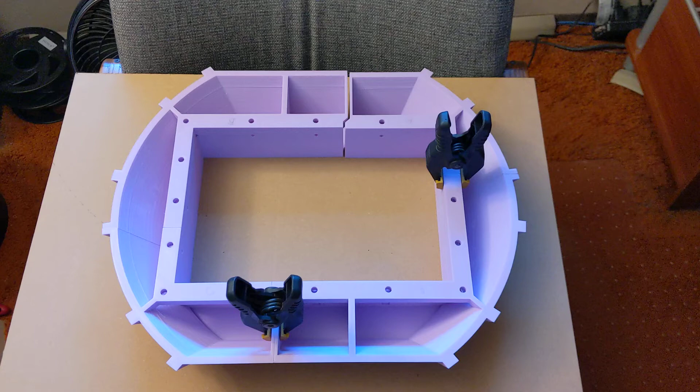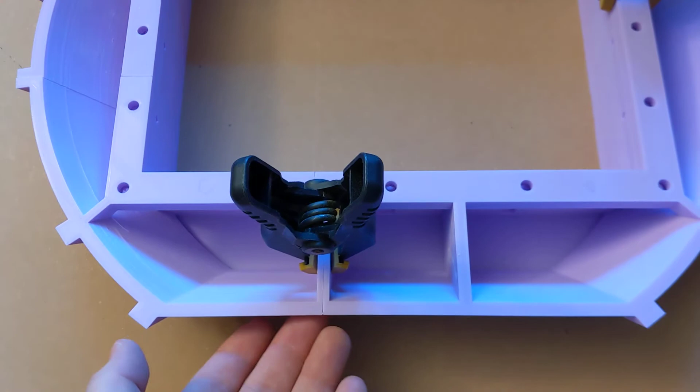Alright, another picture of the skirt here, another video of the skirt. Seem to have a slight issue here. I've got this clamped where it's flush front and back. These two pieces are flush front and back. That leaves me with this, which I think is my problem piece.

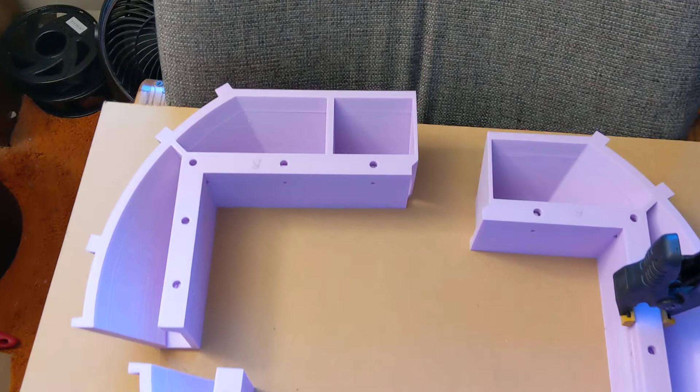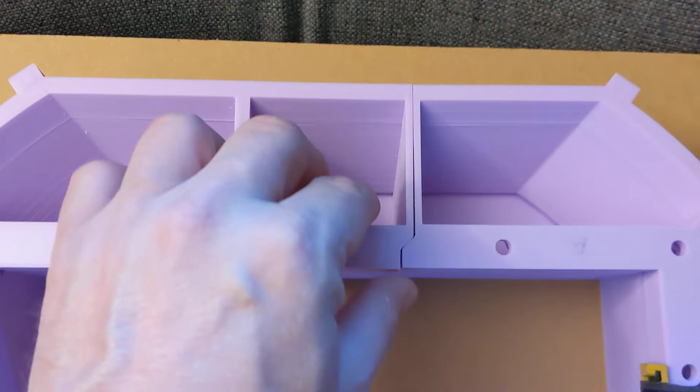If I line this up flush front and back, that is definitely not right, that is way off. Now, it's a little bit hard to tell because I've got the other two sides clamped. But one thing I noticed is if you look at this part, if I do line this joint up flush in the back, it's flush right here. But by the time you get to the end of this support, this piece is obviously longer.

So, yeah, I don't know if my printer messed that up again or if it's the sliced file. I might actually load the file into my slicer and put those two pieces up against each other and see. I don't know if my slicer maybe messed it up when it sliced it or if my printer had an issue printing it. It's just weird that the back corner would be fine and the front corner would be off like that.

If I do put this one together with my fingers, just kind of flush up the front, then I can go over here and kind of join this together. So I'm trying to figure out how to fix this basically without reprinting this entire piece. If I reprint it and find out that there's something wrong in the file and it just does the same thing again, that's a lot of plastic wasted. And it is just the skirt that nobody sees.

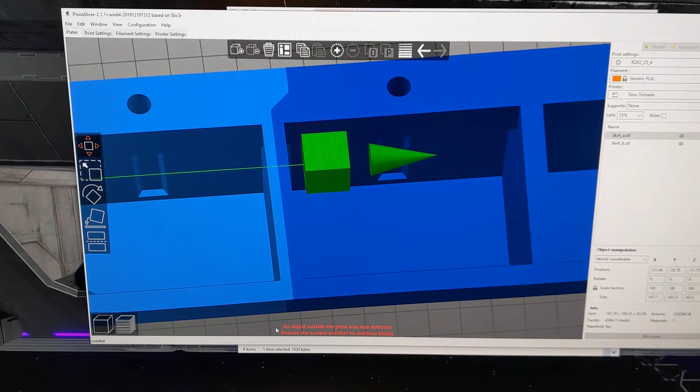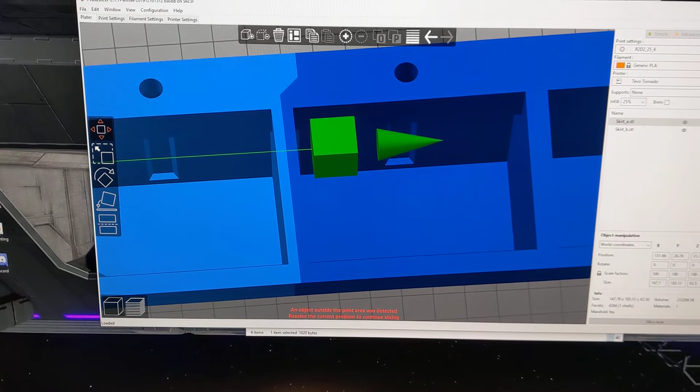This is piece A and B in PrusaSlicer, and putting the pieces together, they fit perfectly, so it's not a problem with the models. Unfortunately, I can't slice them because the two pieces put together are bigger than my print bed, so there's a little error message at the bottom of the screen basically saying something's off the printable area. I guess I could reduce them in size by 50% and then slice them and see if I can see something introduced by the slicer, but at this point I'm thinking it must have been my printer. How or what or why, I don't know.

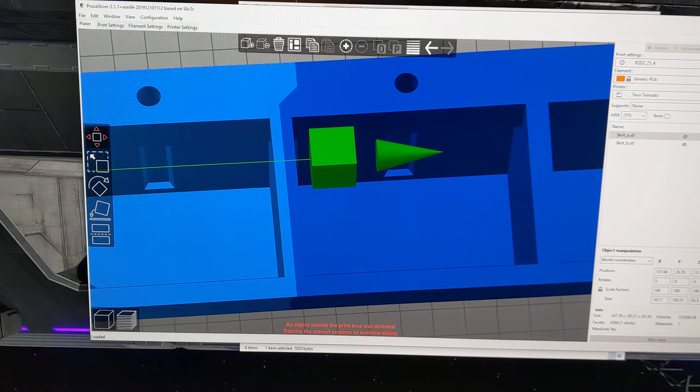It makes me nervous for the rest of the project, if pieces can just be printed out of alignment like that. I'm sure I'm not the only one, though, that has this issue. So I'll have to look online. I have just sent a request to sign up to the 3D Printed Droids Facebook group, where I can probably find more information about this, maybe.

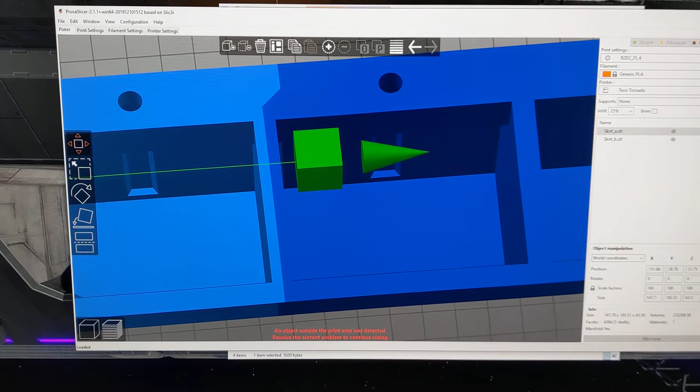I have tried dremeling some of the top of the actual piece, and it does seem to be making it fit a bit better. I'm also going to have to dremel the other side of the piece, this side up here.

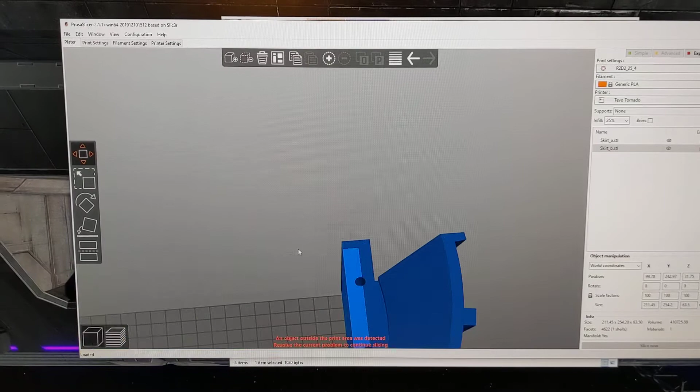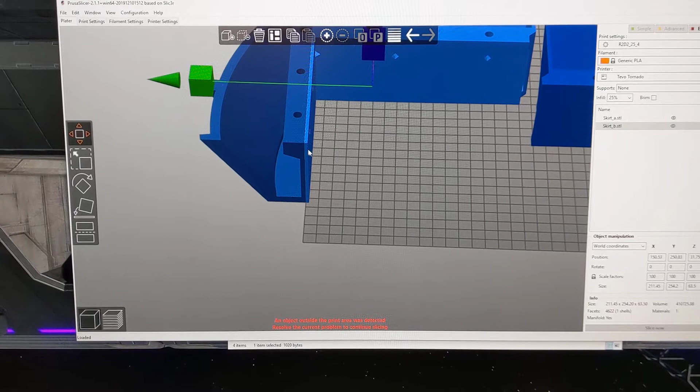Because dremeling the other side makes a slight, I just moved it out of position there. Dremeling this side makes these pieces not fit perfectly flush, so this one isn't fitting flush, so I'm basically going to have to dremel a bunch of this away, which again will still leave this surface area that should mate okay. If I'm nervous that that's not strong enough, again on a piece that doesn't really support any weight, not structural,

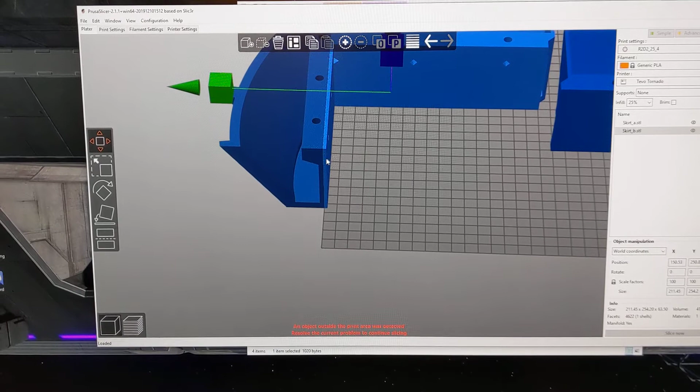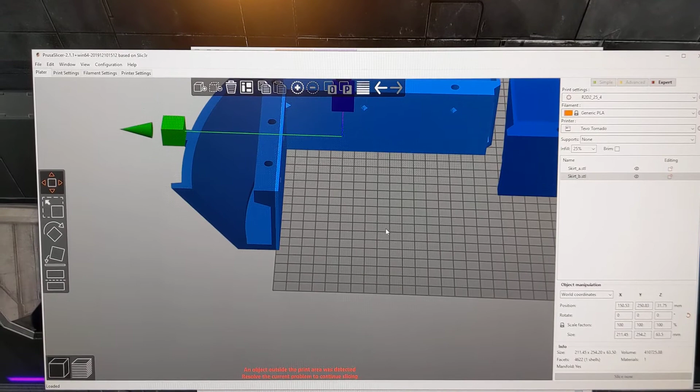I could put a piece of plastic across here and glue it in as like a brace, and maybe down here, maybe even across this side. Well, I guess what I'm going to have to do is try that, get the pieces put together, and then put the top ring pieces on top of it and see how the holes line up. If the holes line up a little bit off, that should be okay. I should be able to elongate the holes. Or again, I could just try reprinting that one large piece and see if it prints properly the second time.

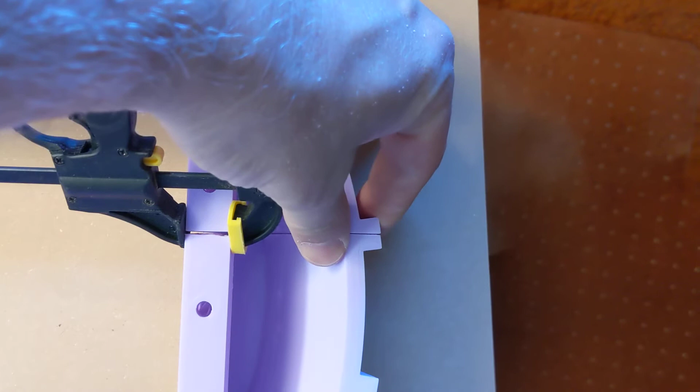Filed away some of this angle so I could push this piece back so it's flush up front, which puts it just a little bit off in the back. Sanded off, Dremeled off down this seam on this side of this one piece that's off, making the rib, I mean, if I just get another decent clamp, I can clamp that so it's flush. There's plenty enough room for glue for a good bond. This one's flush. This one's flush.

So it looks like just kind of manhandling this piece into shape by dremeling it and then using a couple clamps when I glue it, it should be okay. Now the question is, are the holes going to line up all right? Yeah, and that's kind of hard to tell because I can't really clamp this together because of the shape of it and put the first ring of the base on top of it. It's probably going to fall apart.

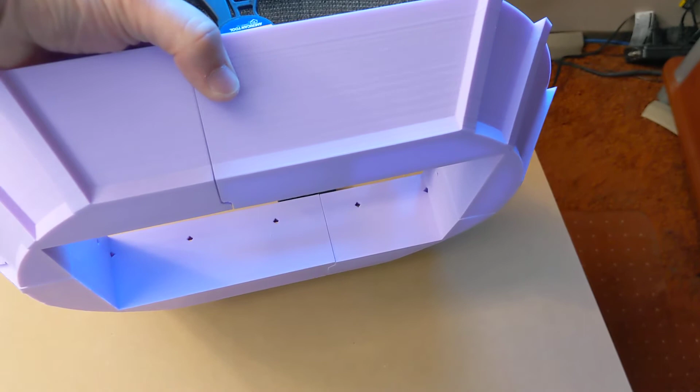You can't really, well, maybe I could clamp the bottom. I guess there is that flat section there. You wouldn't be pulling the pieces towards each other, though. You'd just be clamping them down there. Like I said, I think it'll be okay. This is only like 1/16 of an inch off here. And this actually feels fairly flush there. And when I pull this, it's basically just flexing this plastic just a bit to get that seam to line up because it's just a hair off. But this feels pretty lined up.

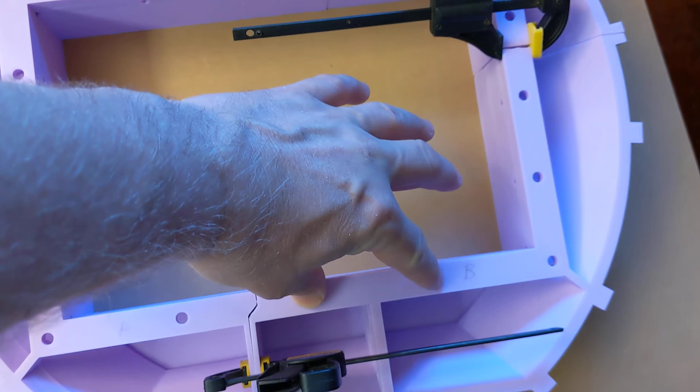So I think these two screws, this one will be the worst and this one next. I think in the instructions it says you don't need to use the corner pieces, and getting a bolt in that corner piece looks like it'd be a pain in the neck. So I'm thinking you'll use 4 bolts to bolt this to the body. Oh, and also there's the plate that holds the third leg, center leg. They all get bolted together. I mean, we're pretty well flush on top.

So yeah, I think the only issue might be these 2 holes. I guess these 2 might also be an issue because they should be a little bit in this direction. And these are made so you can put bolts behind it, so the bolt heads will go behind this. So this part might actually not be where I have to enlarge the holes. It might be the ring of the body that sits over this piece, and then, as I said, there's a big heavy plate that supports the center leg. So those pieces I might just have to enlarge these holes. Like I said, maybe a 1/16 of an inch.

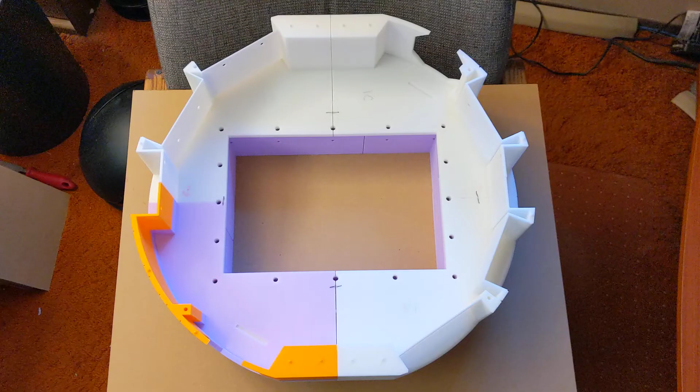So yeah, pretty happy with that. Although I wish I could put my first ring on top of it. Maybe I'll try and take the clamps off and then gently lay the first ring on top of it and see what the holes look like. All right, this is about as good as I can get it. I can't clamp the bottom. There's no way to clamp the bottom and put the ring on the top of it. So it's just pressed together as close as I can get it.

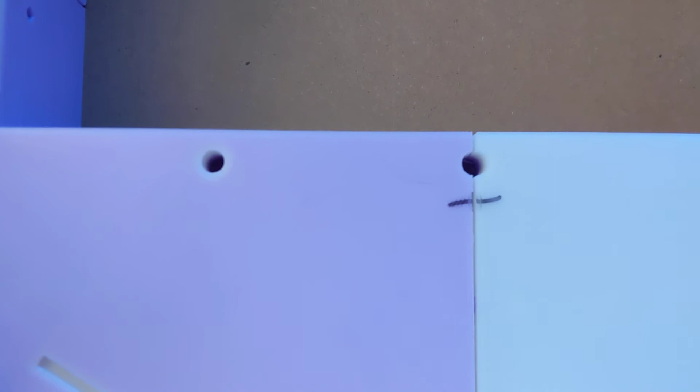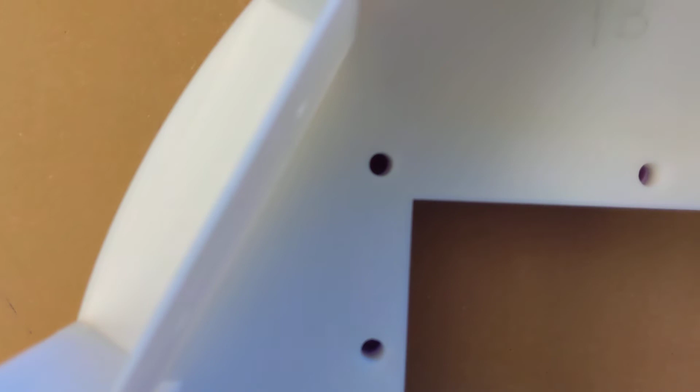And I'm not sure how good this is going to focus, but if we go around the bolt holes here, looking directly above the bolt holes, that one there, just a hair out of alignment. That one just a hair out of alignment. Yeah. And these are actually fine, which is interesting that these are fine when this block is the trouble block, and it's actually back. So it's flush in the front and not in the back, but the holes are lined up perfectly.

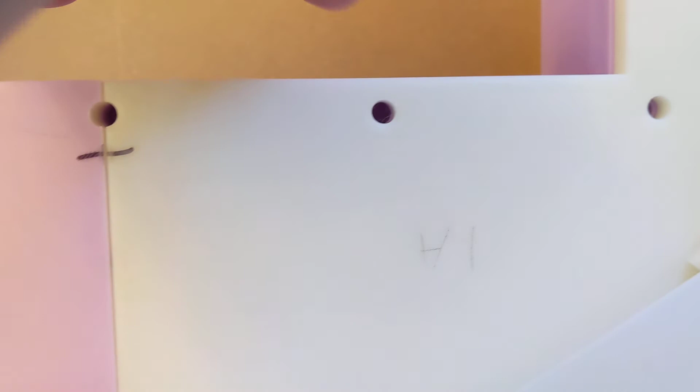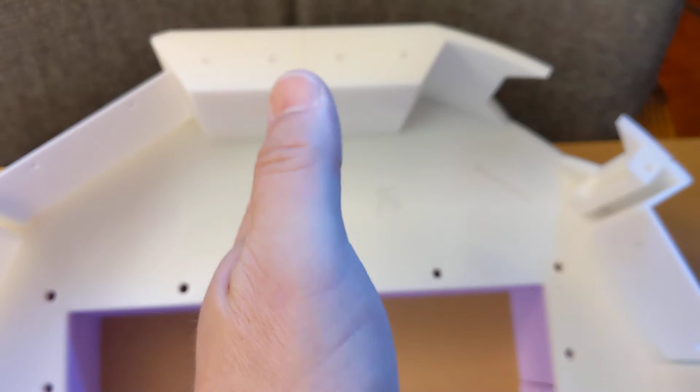So yeah, 1, 2, 3, 4, 5, 6, maybe 7 there. I think I've knocked that one a little bit. So again, this has some slight gaps because I haven't clamped it or glued it, and I also haven't decided if I'm going to do some more sanding to try and get it a little bit closer together or not. But just a loose fit tells me that that's pretty darn close, and I should be able to just modify the hole size to get the bolts through there, and it shouldn't take that much because they're really close.

So I'm thinking that this is going to work. Again, rather than printing that one block over again and then maybe find out that there's something with my printer which does another one bad, and then that's 2 prints, and I think those were like 20-hour prints. Have 2 bad 20-hour prints, or just do this where it looks like it's going to line up fine. It looks like it's a good, viable solution.

Again, that skirt is not load bearing, just bolts come up through it into this, and then there's a plate that lays on top of this that's really thick, and the bolts just clamp all 3 things together, and then the center leg clamps to the plate. So I'm thinking that this is okay, and that maybe my next step for the skirt is to go ahead and start spraying some primer filler on it and sanding it smooth, and then maybe it can be glued together.

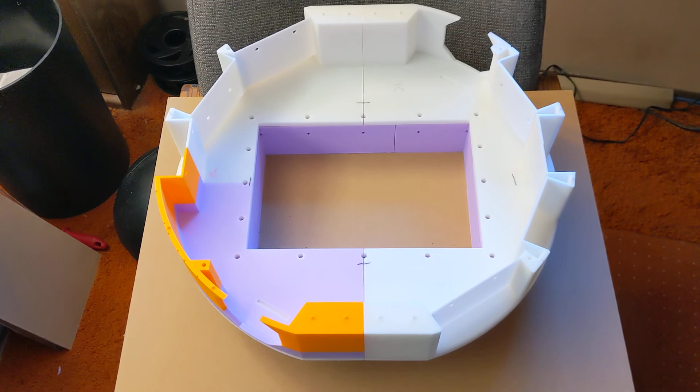In the meantime, supposedly my additional 5 spools of white PLA are on their way. Which again, I was just going to use this same brand, so the body, I used up all the same brand PLA before I got into a different brand. Now I'm kind of thinking maybe I should stick with white, even though it'll be 2 brands, and just use the colored stuff for the legs or greebles or something. I don't know.

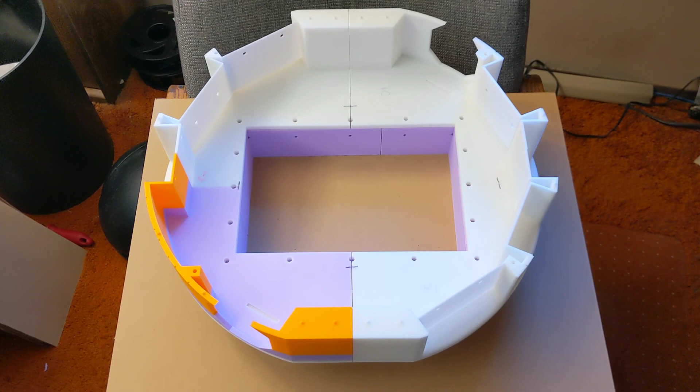Somehow I'll end up using all of this PLA that I got for super cheap with my Tevo Tornado printer off Craigslist, so that's gonna save money, because that's, what was that, 5 spools, 6 spools if I use the clear, so that saves a chunk of money.

So that's kind of where I am for today. Not sure I'm going to do anything else today. I start my work week today, so